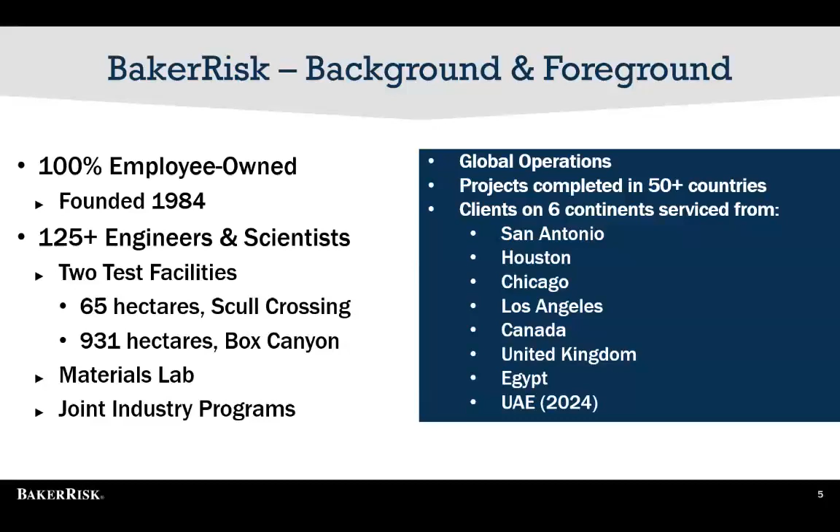Okay, what we do. So we have 7 major areas, service areas, and then we have one wholly owned subsidiary, which is product oriented. The 7 areas that we have for services are process safety, and that's what Rob and James will be speaking about here momentarily. Structural response and blast effects.

Now, those 2 categories are areas in which we gave a week-long course 2 weeks ago in Cairo for the capacity building program Wave 2. We also have another service area known as accident investigations.

That's what we're all about.

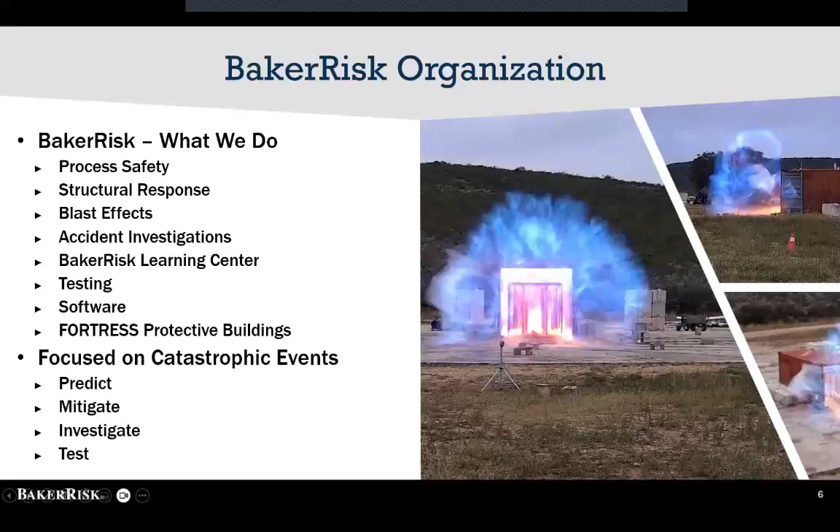One of the key things James will be focusing on is the importance of leadership, senior leadership, in all this. A process safety management program will be destined to fail at some point if there is not strong acceptance and leadership from the top of the organization.

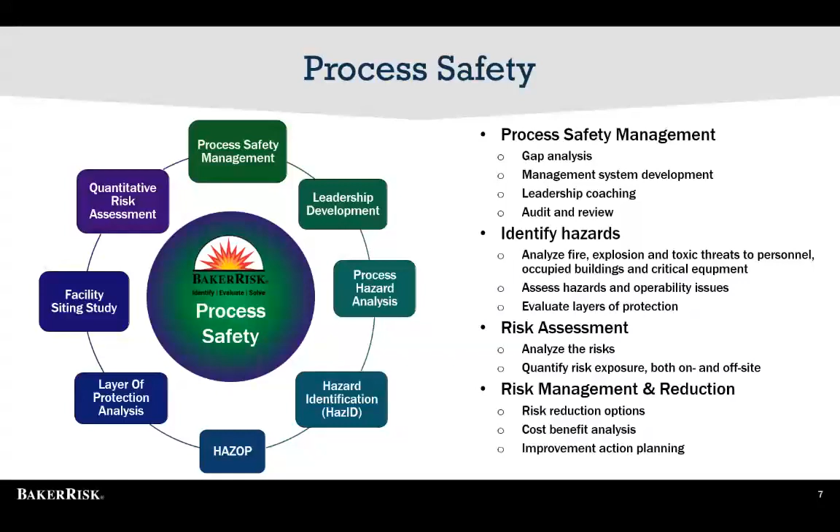Okay, getting back, I mentioned earlier our joint industry program. We have several of those, programs where firms have basically funded research that they want to see, and we have a few different joint industry programs. One is known as the ERC, Explosion Research Cooperative, and a lot of the videos and photos you'll see of testing and explosions were done on their behalf.

Another one we have is for pressure testing, and another one we've been active in for several years now is ammonia and fertilizer, focused on that industry. Those are known as JIPs, Joint Industry Programs. We have global members involved in all of those.

We're also quite active in authoring and contributing to various CCPS guidelines and books. The most recent one is Managing Abnormal Situations. I think we have another pending one coming out shortly - James, do you recall the name? Off Maintenance and reliability - returning equipment to service.

And then certainly validation testing for industry standards, API 752, 753, 756. Those are all in the process of being updated as well, and I'm told will be released imminently. We're very actively involved in API on a variety of committees as well.

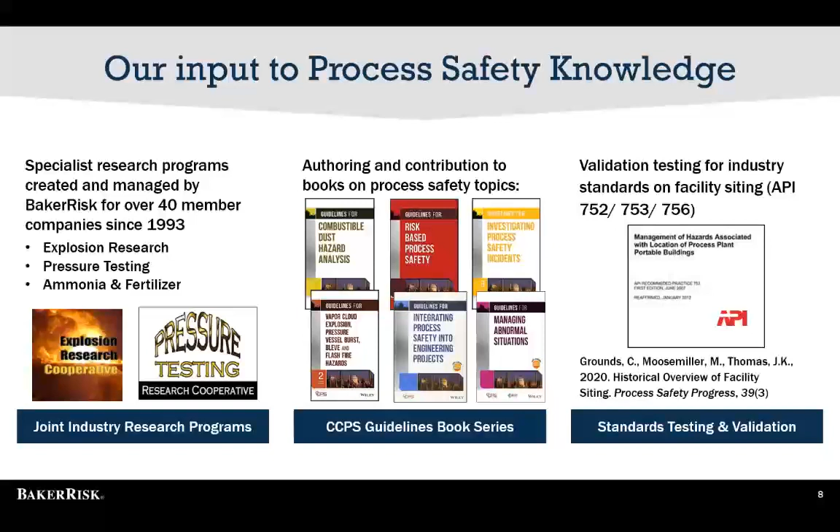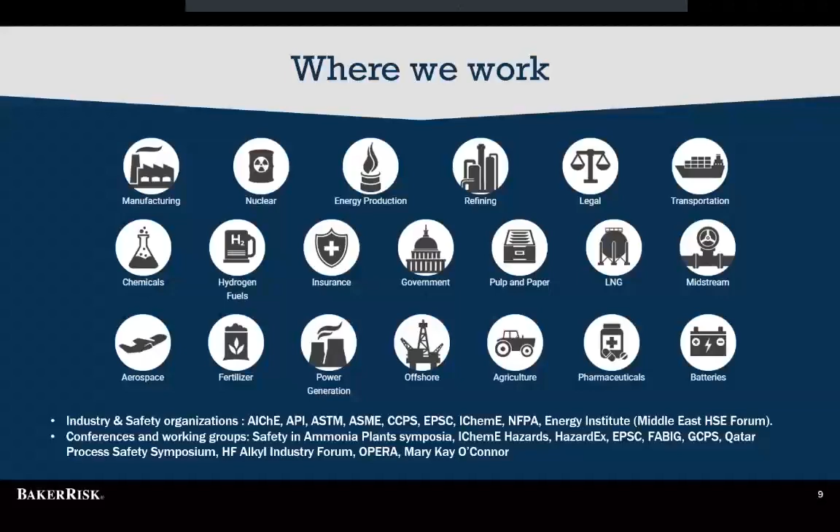Okay, our commitment to the Egyptian PSM program. I want to thank from the ministry, Engineer Ala Hagar and Wessam Sakar and their staff for their cooperation and support over the last year, not only in this webinar, but they've been quite good to work with and very receptive. I give the ministry a lot of credit for what they have set up here.

We have the opportunity to view PSM programs throughout the world from various countries that have set it up. One of the reasons we are so committed to Egypt is that Egypt has done it right - it's probably one of the best I've ever seen globally for a country setting up a new program, and you've done it extremely well, continuing to do it extremely well with all aspects, including your capacity building program. You should all be very proud of being part of the industry in Egypt.

We are certainly very supportive of each of you, and will continue to show our commitment as we have for the last several years.

Our involvement started several years ago with the PSM technical peer review process. I want to thank Amr Hassan, an independent PSM senior consultant. He headed the technical subcommittee, and it was from his involvement that BakerRisk was brought in. Rob McGraw got involved and led a team of 10 or 11 people from BakerRisk doing technical peer reviews over a period of time. That really made us aware of what was going on and kicked it all off.

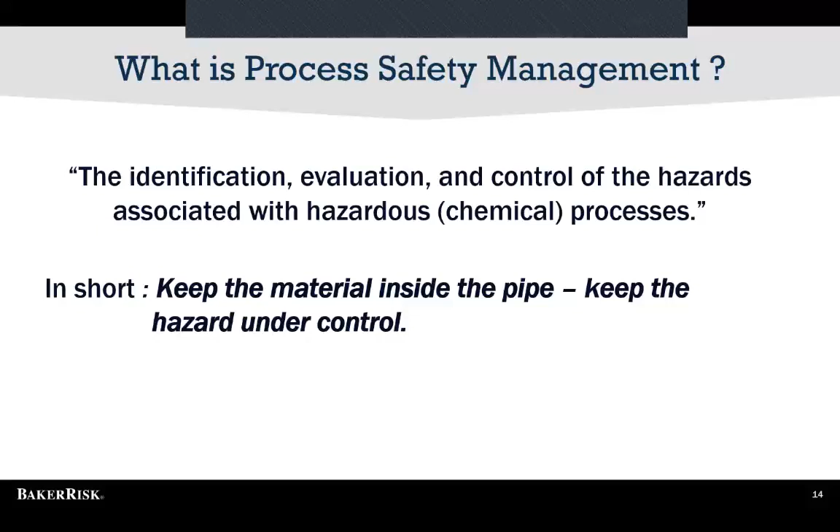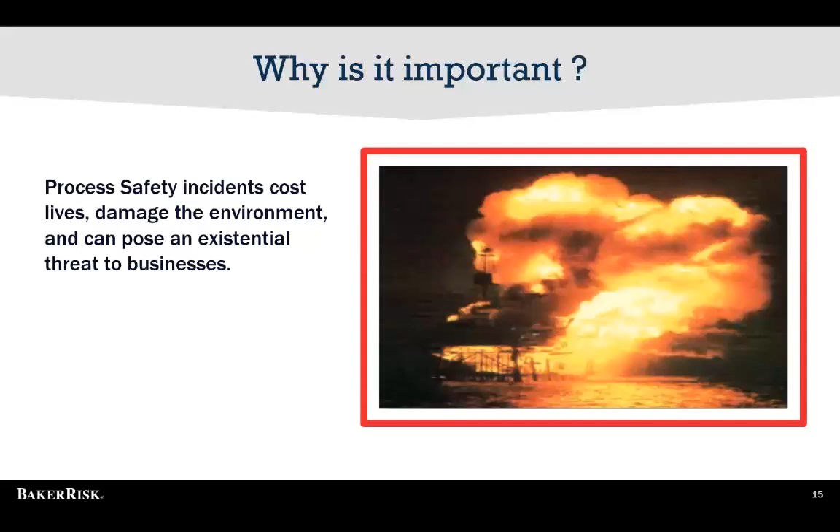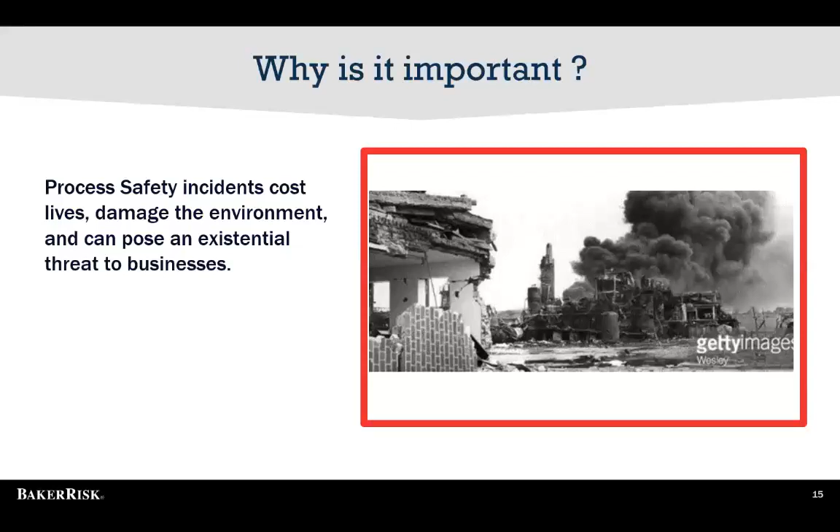The examples shown include many from onshore, upstream, downstream, midstream, chemicals, and other sectors, as well as offshore. Examples go back as far as 1947 to the SS Grandcamp, a ship that exploded containing ammonium nitrate in Texas City, through to the famous Flixborough explosion in the UK in 1974.

That killed 581 people and injured countless thousands of others. There was a cyclohexane explosion that killed 28 people, and was very much a catalyst for the whole process safety development.

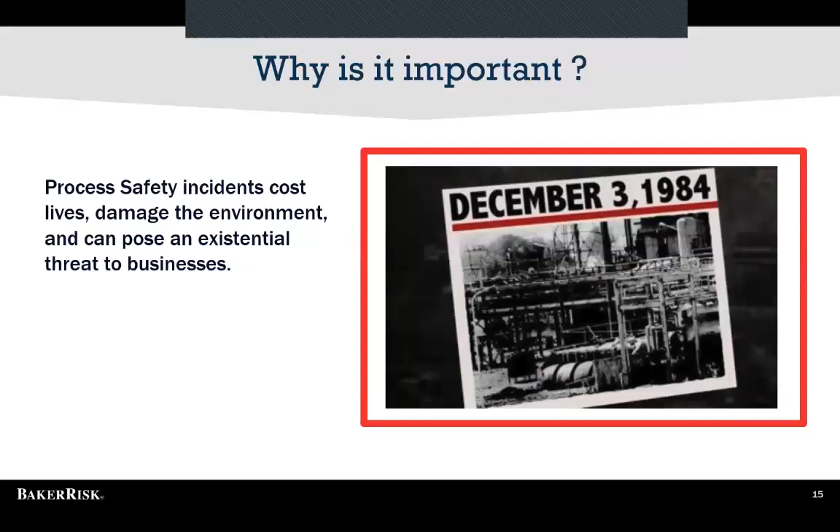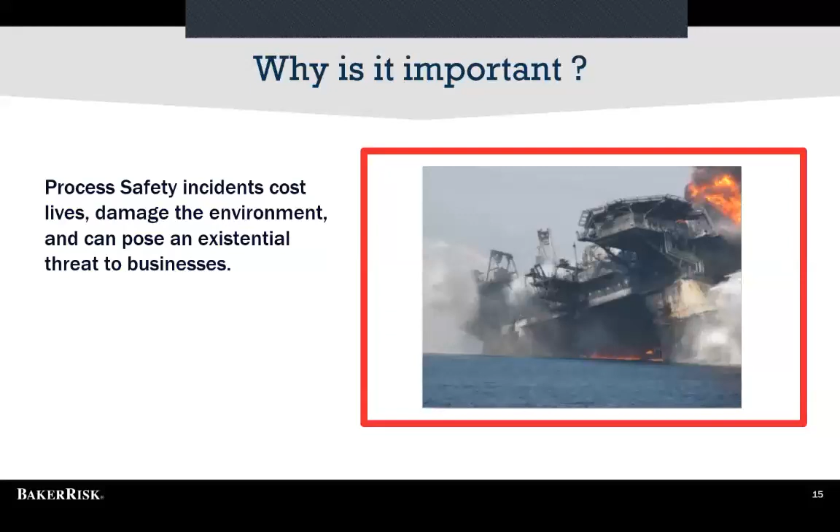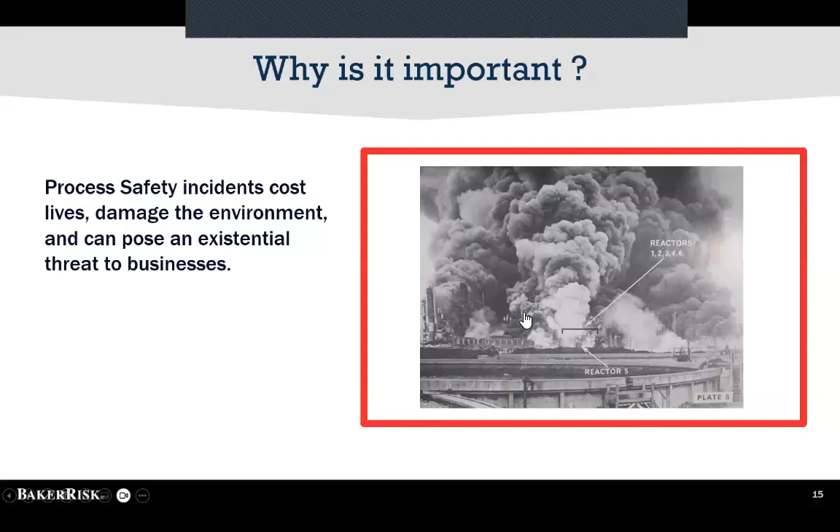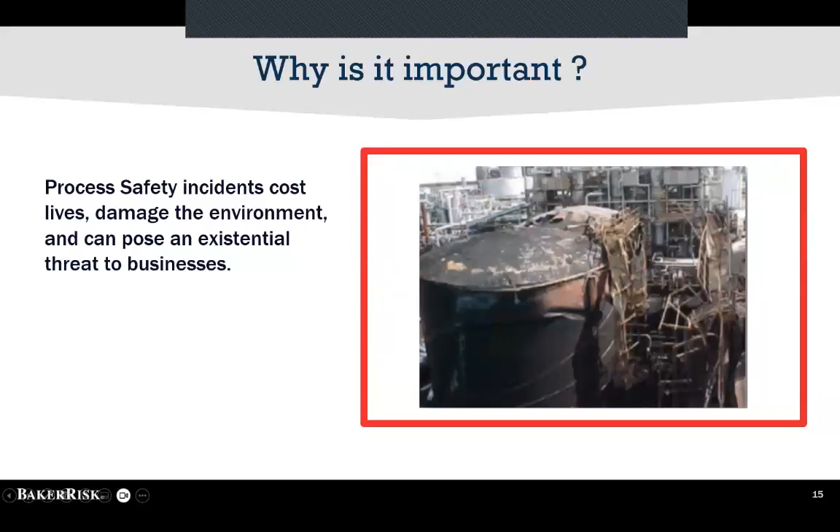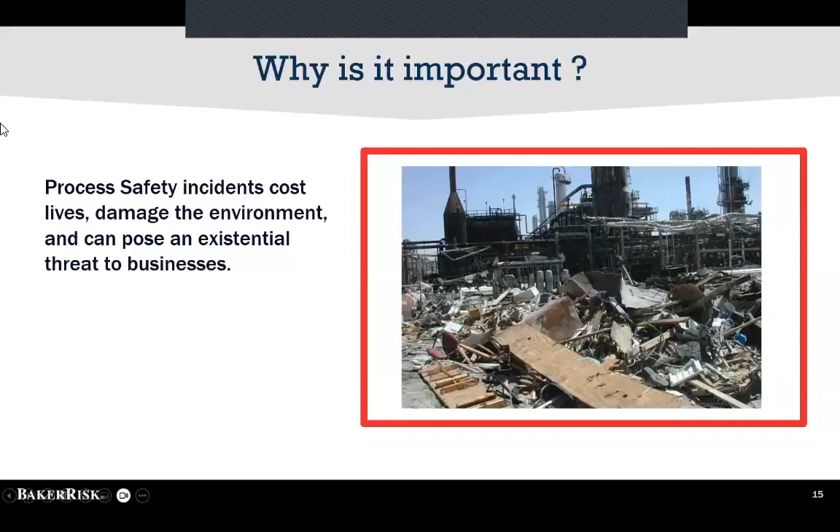Offshore, we've got the Piper Alpha platform - multiple explosions and loss of the platform in the North Sea in 1988 that resulted in 167 deaths and major changes to the regulation and control of offshore development in the North Sea.

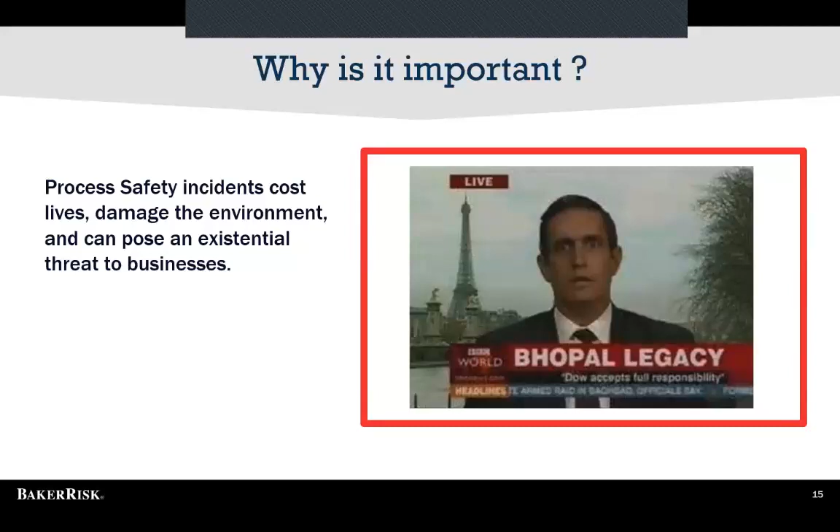More recently, we had the BP Macondo well blowout in the Gulf of Mexico. It killed 11 people and caused massive environmental impact, with ongoing oil spills for several weeks after the initial explosion.

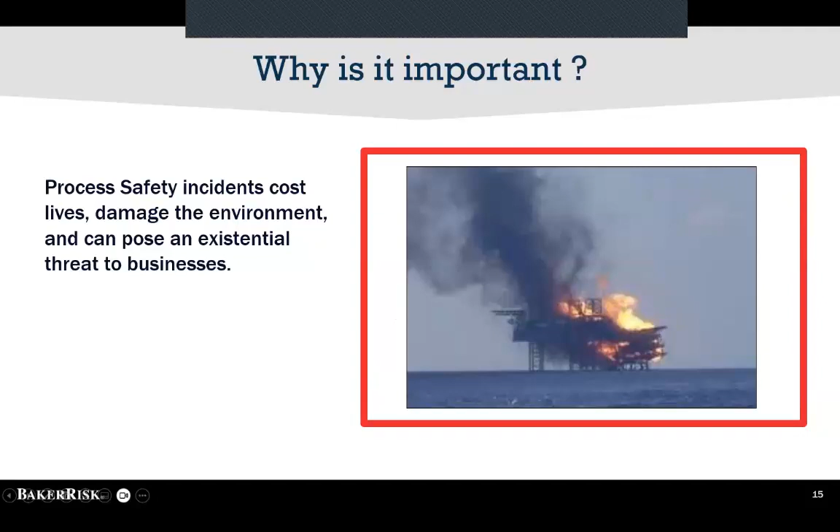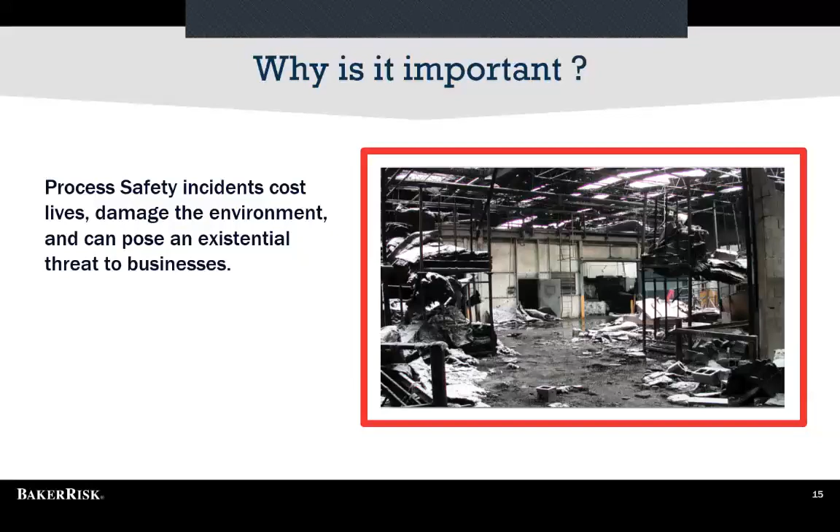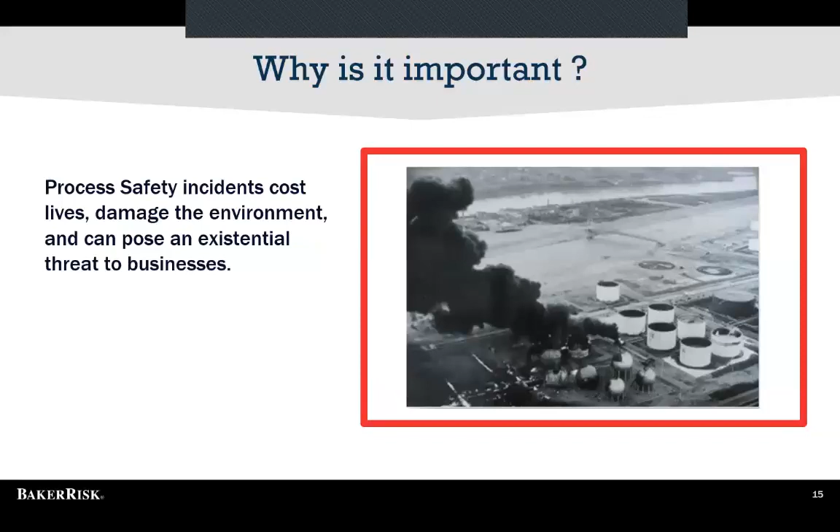Process safety management considers risks in many forms - business risks. We're looking at health and safety, environmental, financial, and non-financial impacts, particularly in this age of instant social media coverage. The impact on a company's reputation if it has an incident can be instant, so the importance of this is increasing.

So what do we need to do? The key to this is understanding what can happen, and therefore what we can do to prevent it happening.

As Wayne mentioned, we have various research and testing capabilities, and we use those to understand the processes taking place, to underpin the tools we use for doing the analysis, and also a bit of reverse engineering from the incidents we investigate to try to confirm potential theories on how an accident occurred.

We can do tests to confirm whether that was a reasonable hypothesis. From that understanding, we get the knowledge that helps us assist our clients, assist you guys, in preventing those incidents from occurring on your site.

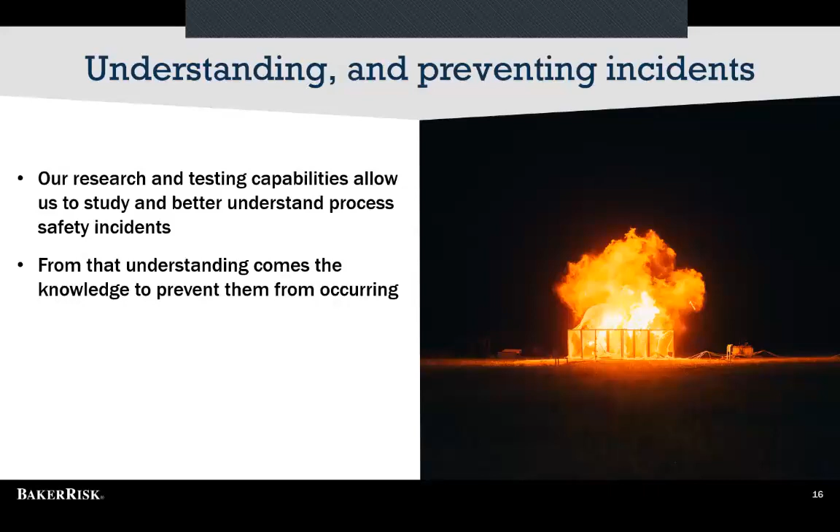This is a view of one of our test facilities, or part of one of our test facilities - this is Box Canyon. In the subsequent slides, I'll go through a series of test videos that show how accidents can develop, from material getting out of the pipe to impacting people, buildings, and other equipment.

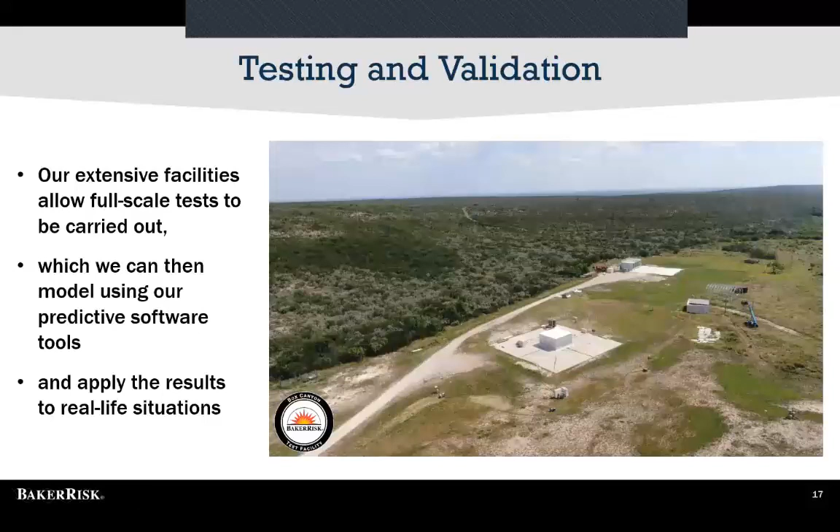So the first thing we said is getting out of the pipe. What does that look like? This.

So this clip isn't very exciting, to be fair. They do get better, but this shows what a release looks like. This is propane being released from an orifice about half an inch or 10mm - a very small hole. The visible amount is just where the water in the air is condensing. The actual cloud itself is significantly bigger than what you're seeing from the vapor.

But bear in mind, this is propane, but equally this could be a toxic material, such as the methyl isocyanate that was released in the Bhopal incident. So again, you can see how this disperses from a small hole. This hole is very similar to many instrument or sample connections that might be on your main process pipework, that sort of small bore connection, and you could get this release into your operating areas, affecting personnel there.

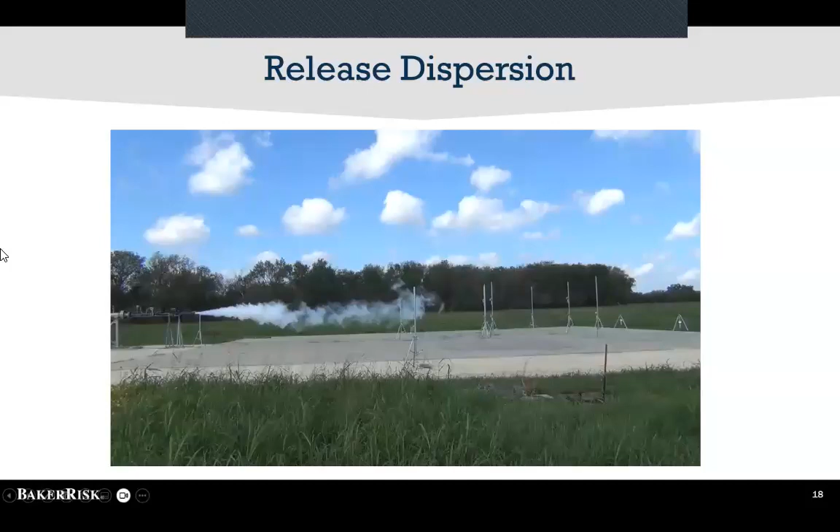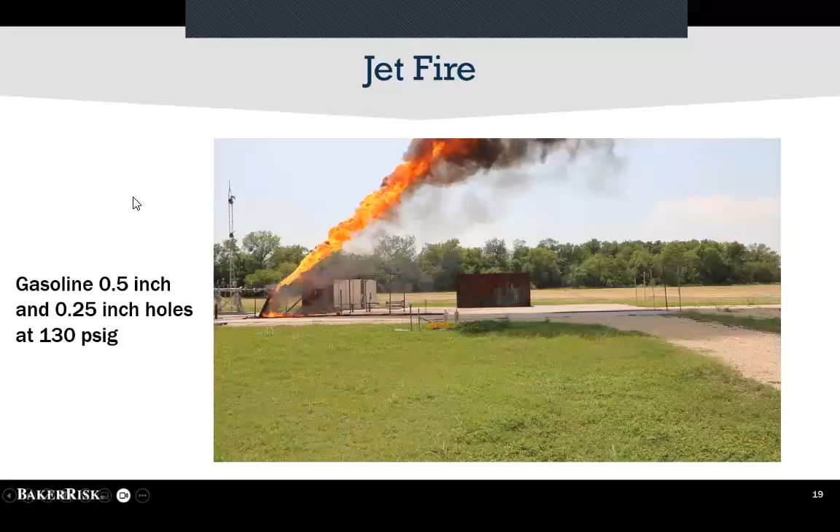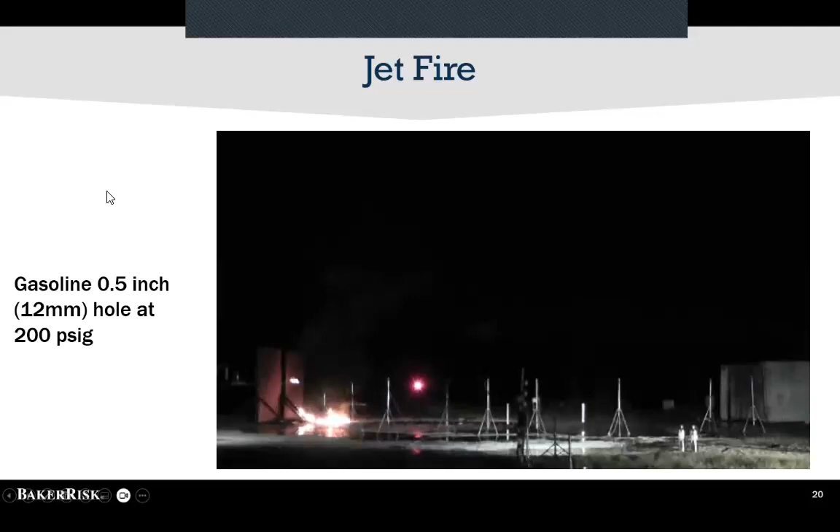Okay, so if we have a release, what can subsequently happen? This shows what can happen if you get a flammable release and it gets ignited. Again, we're talking a very small hole, half inch to 12 millimeters, and this particular example is gasoline. So that shows what happens if you get a release and it ignites fairly instantaneously. Another test at night shows it a bit clearer, and you can see that instant impact across several tens of meters.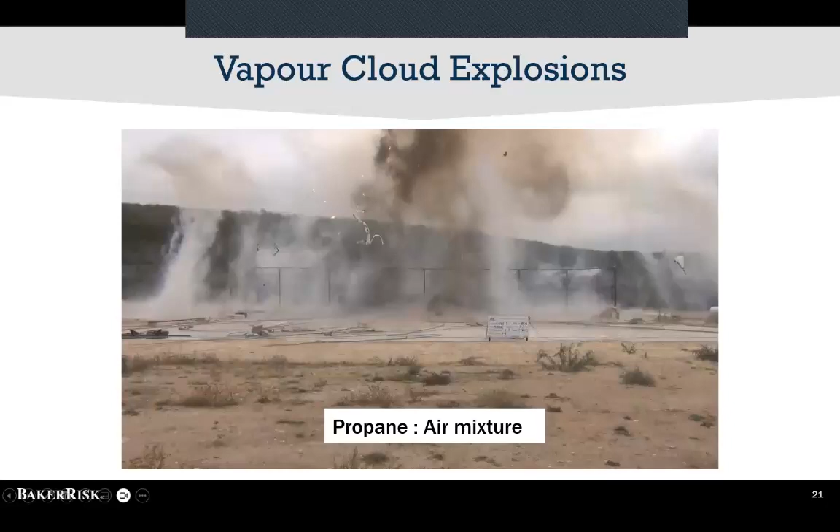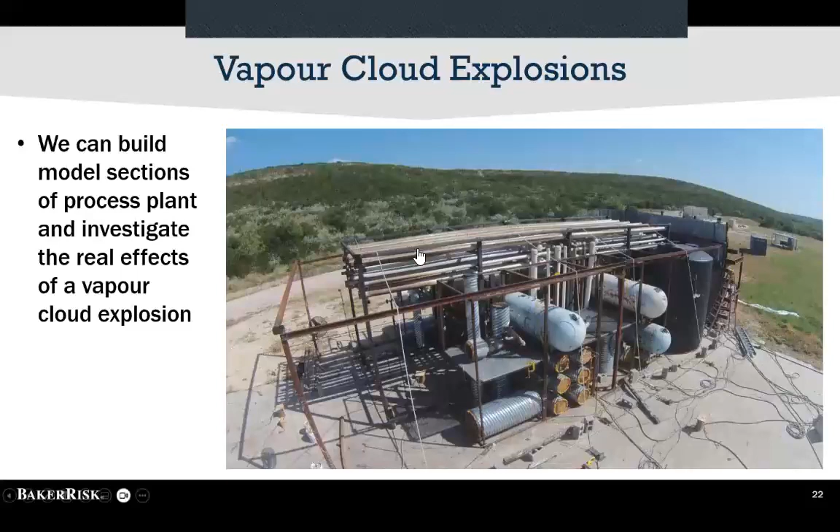So as I said, we use various piping and other equipment to simulate congestion, but we also validate against real equipment. This was a mock-up of a plant unit where we wanted to validate our control tests against some real equipment that was very kindly donated by one of our clients for us to destroy. This shows how we get the same impacts from our control testing with real equipment, and it allows us to validate the testing that we do.

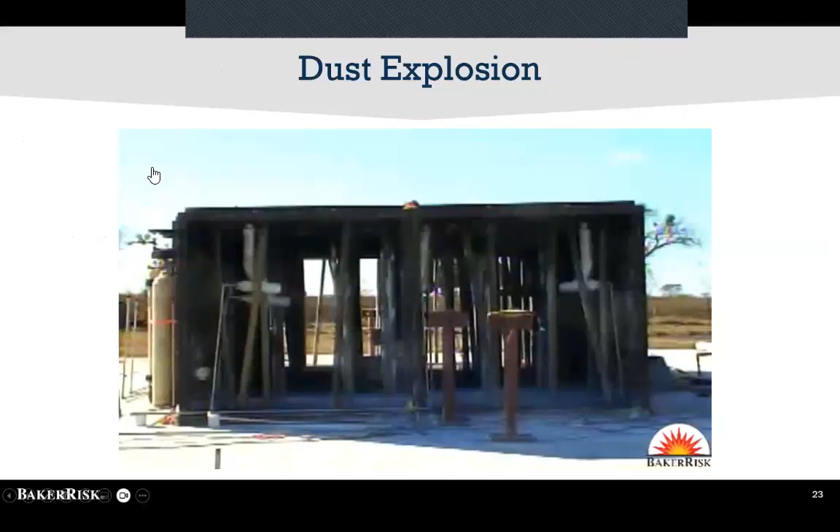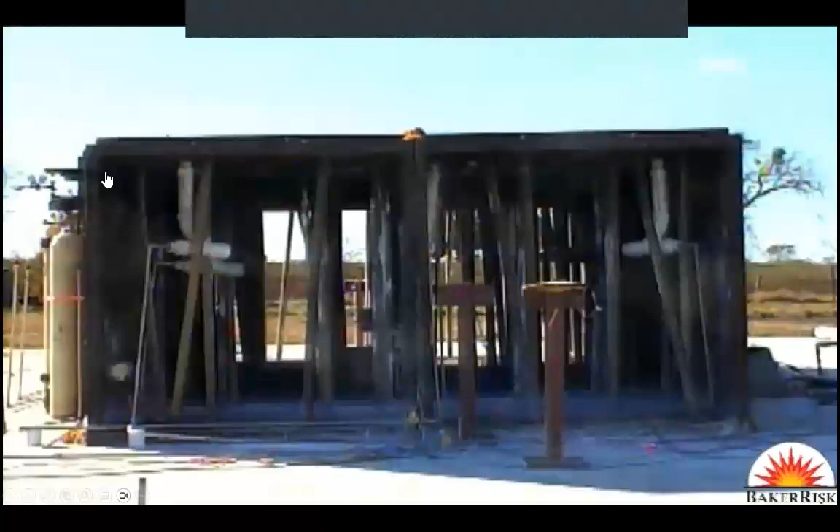Flammable gases and toxic gases are not the only things you may have to worry about. Dust explosions are another potential hazard for many operations. This particular test shows a release of polyethylene dust, and you can see the quite violent explosion that results from what many would think was a fairly innocent release of dust.

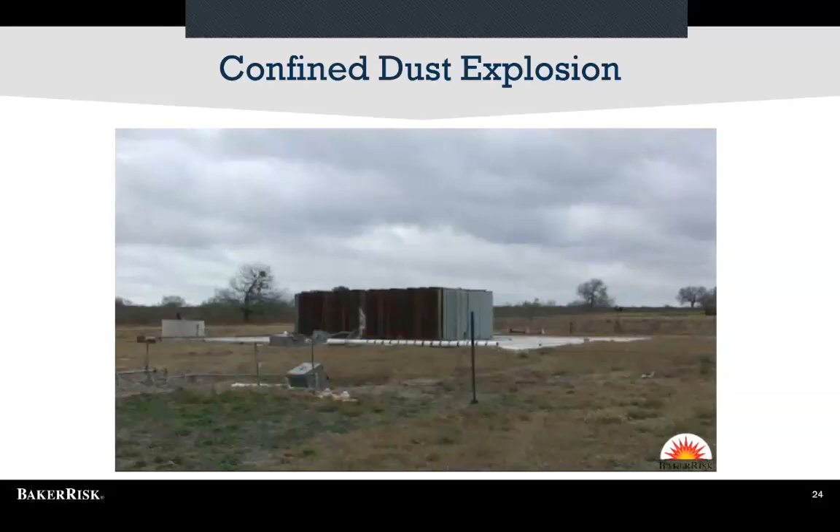Again, I mentioned the impact of confinement on explosions - the same is true for dust explosions as it is for vapor cloud explosions. This test rig has been boxed in - it's a solid rig with panels added on each end, and again a dust explosion is generated inside. You can see how that causes an explosion inside and blows the panels off the end again, simulating what would happen in a real condition with a building of similar design.

So we've looked at these various hazards. There are additional things such as pool fires, where we've done testing, BLEVEs - again another quite violent explosion mechanism - and runaway chemical reactions, all potential hazards that you may need to deal with.

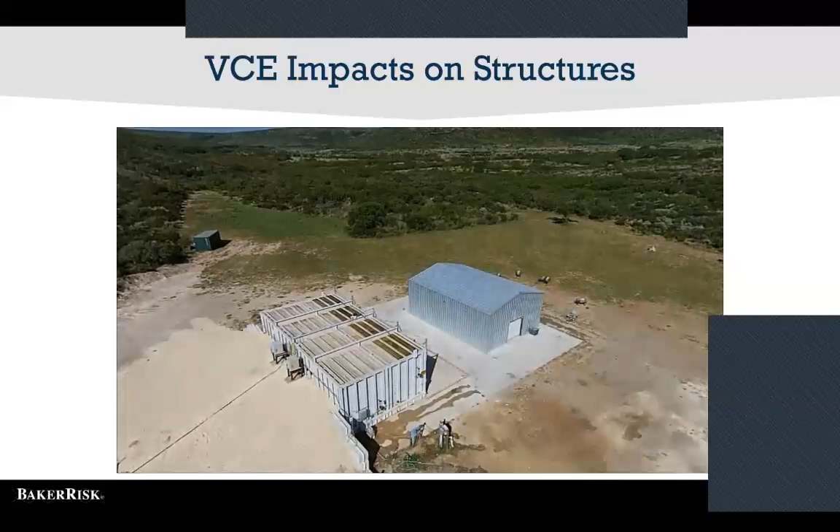So you can see here, although the frame hasn't really moved and the building hasn't collapsed, there's significant damage to the cladding, and the debris flying within that building would pose a significant threat to any building occupants.

So looking at a similar test, this is a similar test again on a blast resistant module. Let's just run the video and then I'll talk you through it.

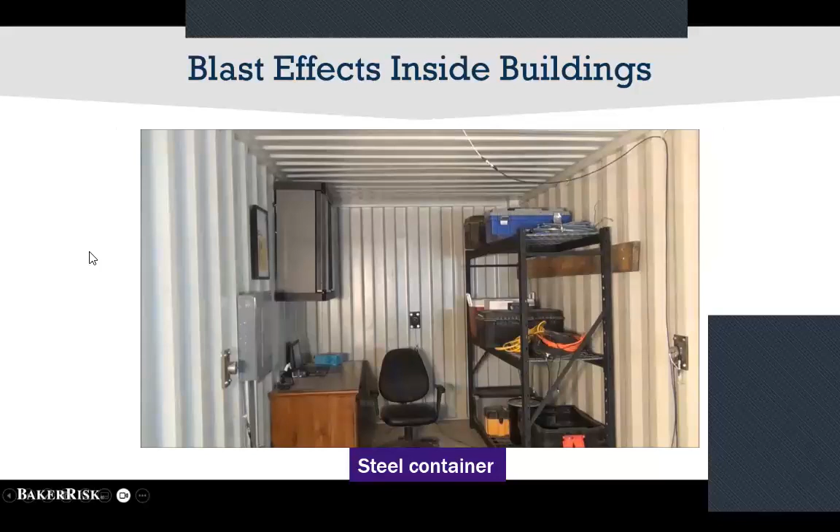So again, this shows the impact inside the building, and although there's some distortion to the actual container itself, it's pretty minimal. But you can see the impact of the fixtures and fittings flying around, and obviously anyone who happened to be sitting at that desk is going to be having a fairly bad day.

So we've identified what can go wrong, what can be the potential impact, and then, well, okay, so what can we do about that to help reduce risk and improve the situation? This is just one example.

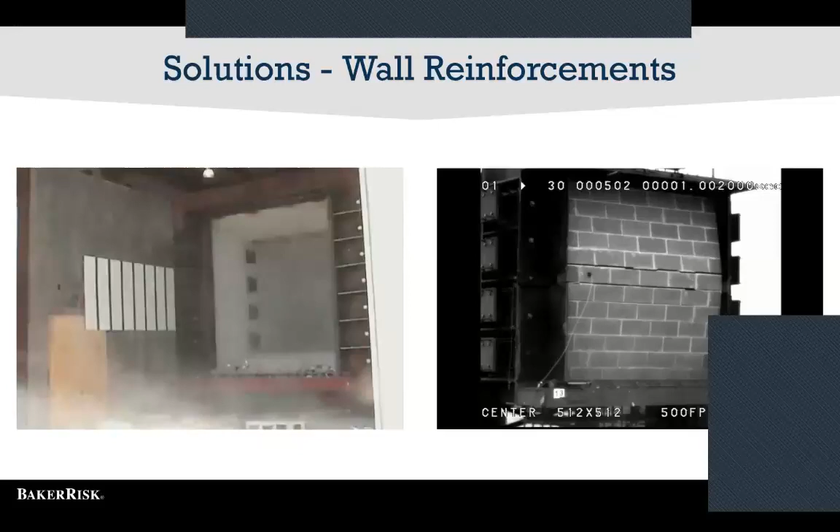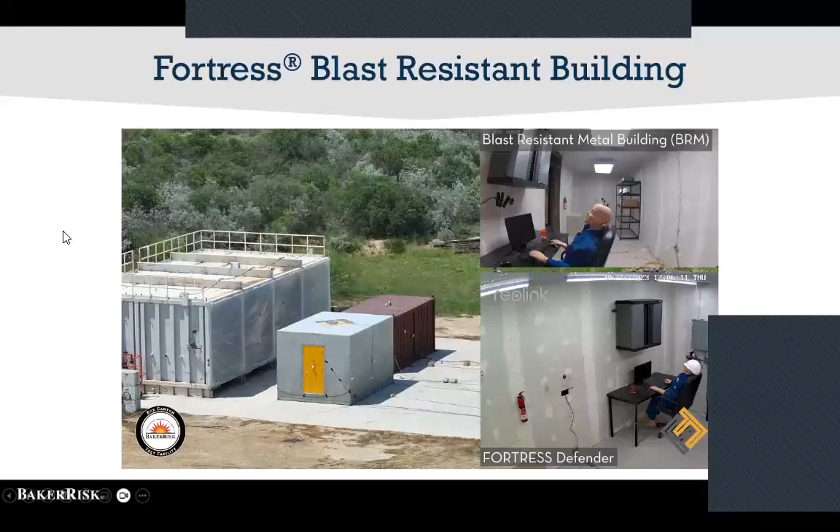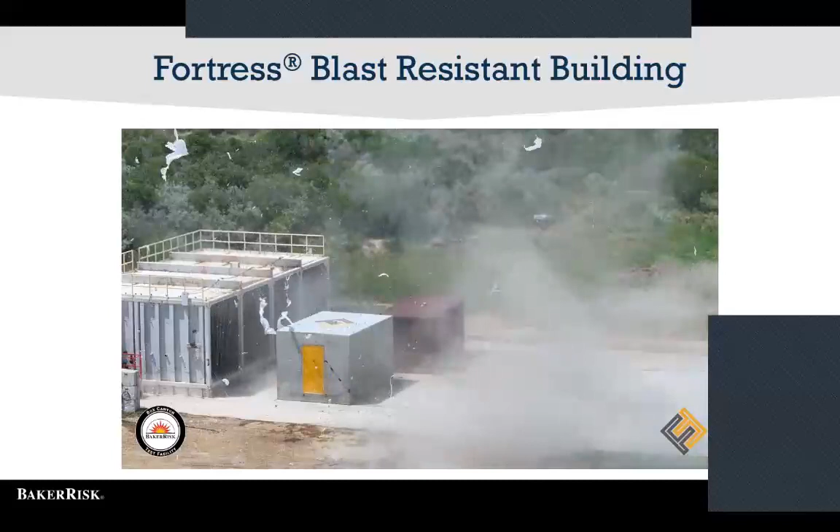And we'll show some internal views as well. I'll just run this video. So instantly you can see how the blast resistant module is pushed back, whereas the inertia of the concrete one held it in place. And then the internal view.

So again, the inertia of the concrete building avoids that violent movement that we can see in the internal of the steel building, where the occupant is likely to be damaged by the movement of the building or the dislocation of the fixtures and fittings, whereas the guy safely tucked away in the fortress building hasn't even spilt his juice.

So you can see that that's an example of a solution to an issue. And again, you could then put that building in a position where perhaps you couldn't put other buildings and still control your risks adequately. Okay, with that, I'll hand over to James, who's now going to talk us through some of the challenges of implementing a PSM program.

Okay James, thank you. Brilliant, thanks Rob. And thanks for that background, which reminds us all of the hazards that we face with our plants. And really, to move this forwards, the standards, the Egyptian PSM standards, as Wayne mentioned, are an absolutely exemplary example of the best practices gathered from around the world. A real achievement putting those together. Now we have the challenge to actually implement them. How do we climb that mountain? And that's what I'd like to talk about now.

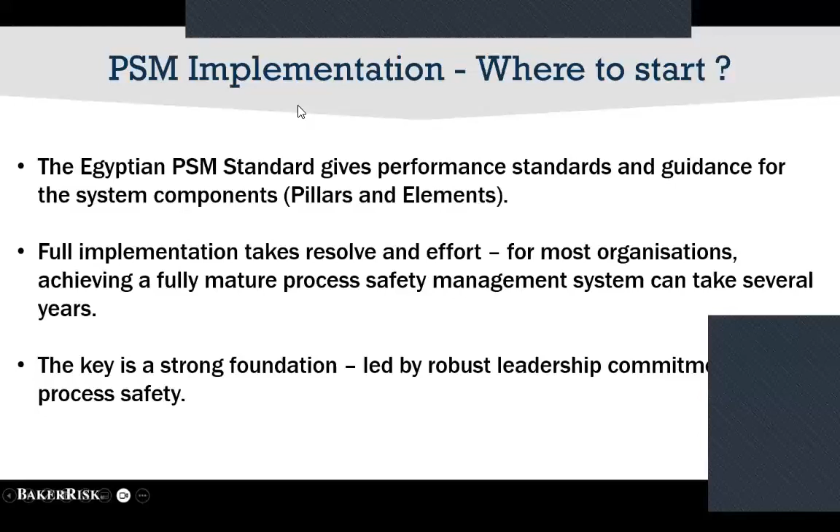That, if it's going to succeed, has to be led by a strong leadership commitment. It's a big task, but I think it's important to remember the saying, whatever the mind of man can conceive and believe, it can achieve. It takes time, it takes effort, it takes focus. But as Rob demonstrated, the benefits to safety, to the environment, and to our business are very considerable.

So really just to focus on that for a minute, the role of leadership is to lay the foundations. If we build a house upon the rock, it will stand strong. And that's the important thing at the beginning of this process. A deep, strong commitment from the top of the organization, from the leaders, will propagate down, will influence the people through the management, the supervision, the operators, to take this seriously, to give it the consideration it needs. And I think it's important to remember there are three questions we should all ask ourselves.

We know we have hazardous chemicals. We know we have hazardous processes. We should always know what is there that can cause us harm.

The next point, going back to Rob's process safety cycle, is in which case, what is going to protect us from that harm? A lion in a cage is still a lion. But if we put the lion in the cage, we are managing that hazard. So we have to understand what are the barriers, what are the safeguards that keep us safe, that keep our business safe, that keep our people safe.

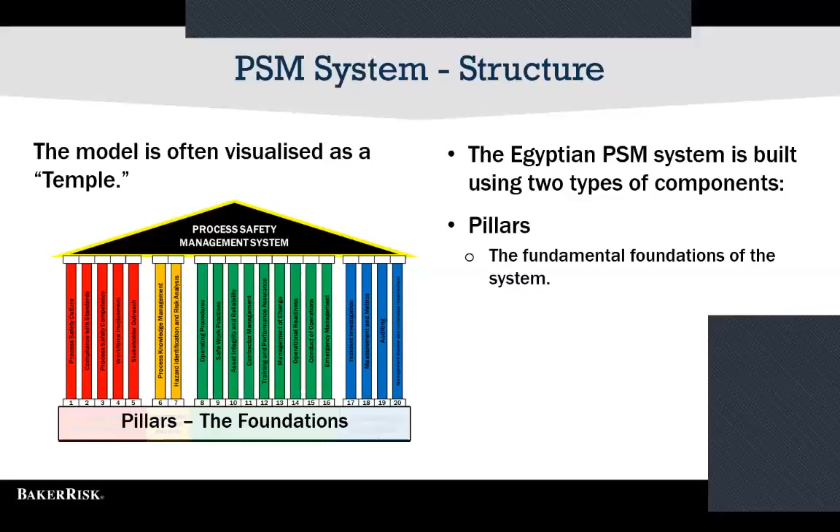It has vertical elements that hold up the roof, and the roof is in fact the system, the business that we support. The Egyptian PSM model describes these as two types of components. At the bottom, we have the pillars, the foundations, the fundamentals if the system is going to survive and grow. And above them, we have the elements - the individual standards which are so well set out with the Egyptian PSM system that hold up the roof, that hold up the building.

Has that dealt with our problem, Joanna? Have we still got the issue? We still have it. Okay. Is it worth me dropping screen sharing? I'm just nervous about doing that midstream.

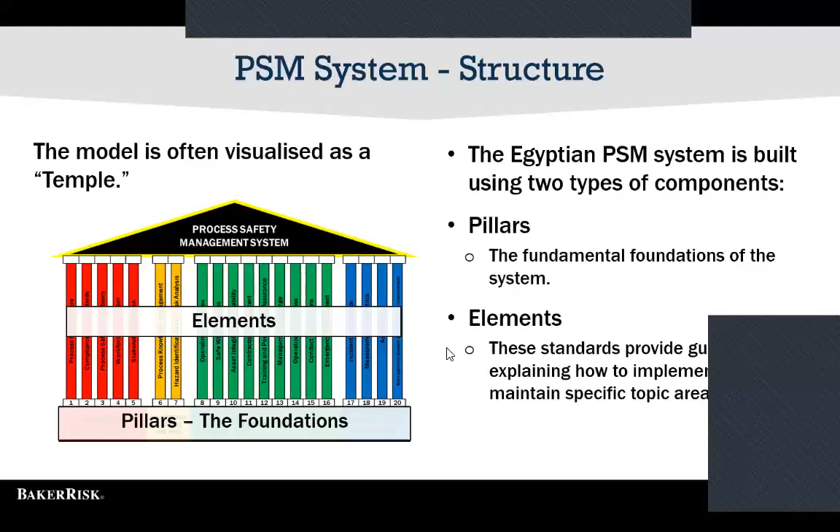I suggest we just continue, James. Thank you. Okay, so let's just look at this now in terms of how do we implement this? We have a model, we have a great deal of detail, but how do we actually deal with the main problem that we face, which is how to implement this?

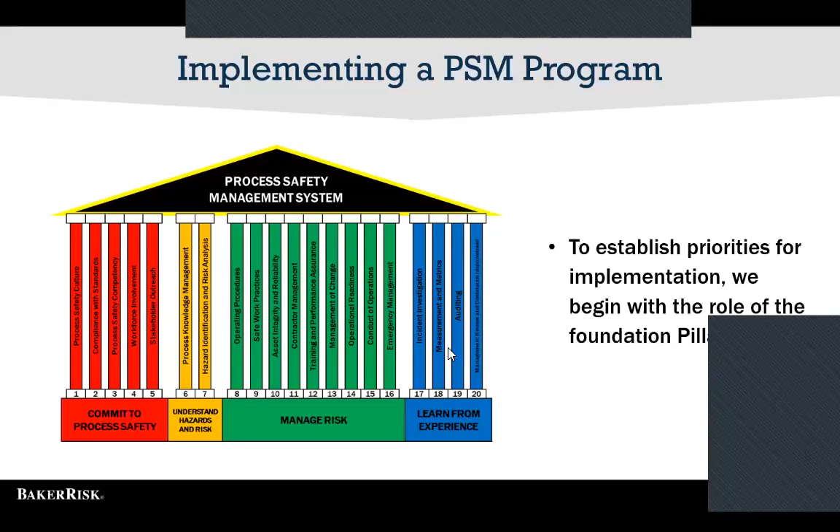So first, let's look at the structure we have. If we take away the detail, we're left with the foundation pillars: the commitment, the understanding of hazards and risk, the management of risk, and learning from experience. And these are so critical because they actually form the improvement cycle that we need in any management system.

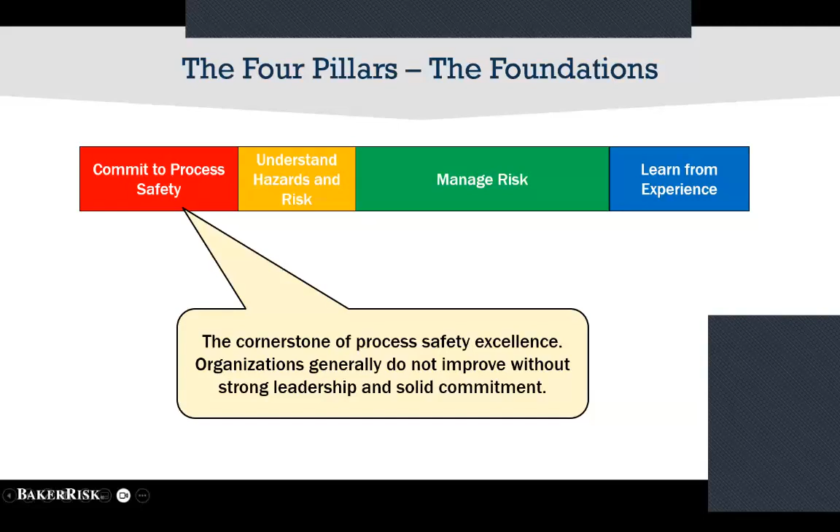So the first one, the commitment, we've spoken about. This is the cornerstone. Vitally important for any system to have leadership and commitment. If we have that, we can provide the resource, we can provide the focus to understand the hazards that we have, to understand the risks that they bring to our business. Because if we don't know about a hazard, if we don't identify that hazard, we cannot manage it.

We look back in history in the case of the Titanic, the ship that sank in the North Atlantic with huge loss of life. They didn't see the iceberg as a hazard, and yet the iceberg destroyed the ship and caused huge loss of life. We have to know about the hazards if we're going to manage them.

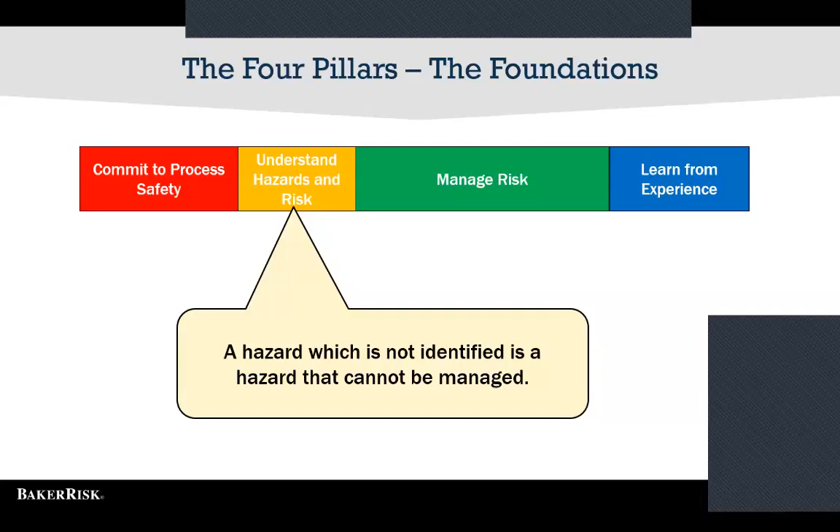Once we know about a hazard, then, as Rob demonstrated in the process safety cycle, we can focus on managing them. How do we bring those risks down to a safe level for our business, for our people?

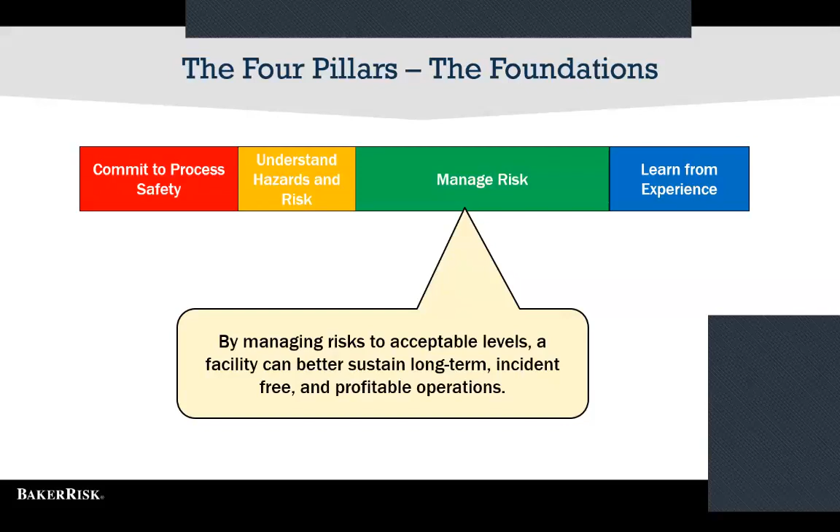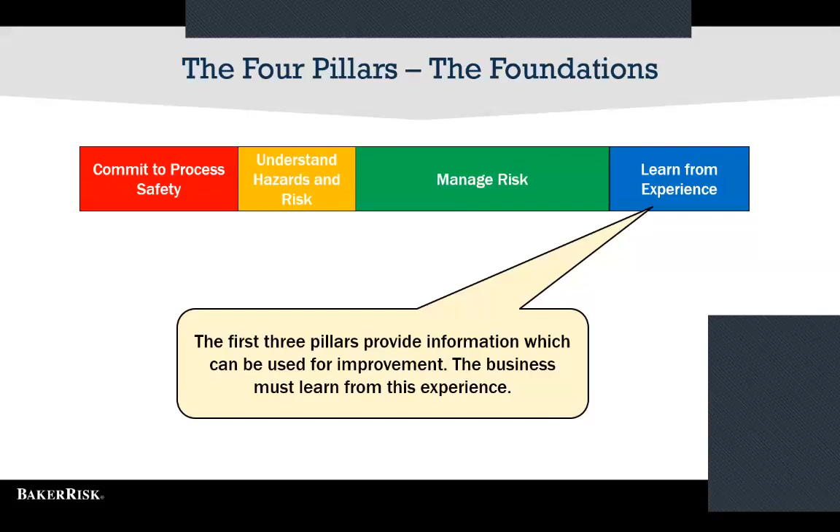And finally, we have learned during that process. We have discovered, we have assessed, we have analyzed. To improve, we must learn. And that is what the first three pillars give us, is that information to learn from. Any business which is going to thrive has to learn. So if we put these four pillars together, they provide a very, very powerful improvement cycle.

We begin with commitment. We understand the hazards and risk. From that, we know how to manage it, to keep our business safe. And as things happen, things will go wrong. But the important point is that we learn from them. We learn far more from mistakes than ever we do from doing things right, even if it's a painful process.

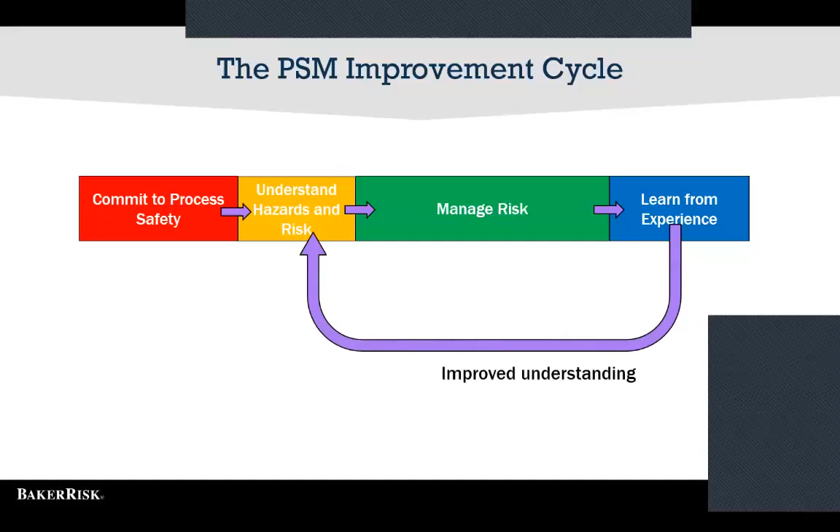But that learning means we can go back and improve our understanding of the hazards and the risks that we face. And as we do that, it allows us to strengthen our commitment. We see that we're making our business safer, making our business better, and it allows us to strengthen that commitment. So that is the key cycle. And that is really what we want to talk about today, is starting this process. It takes time, it takes experience, it takes judgment. But this is the key to making any business stronger and safer.

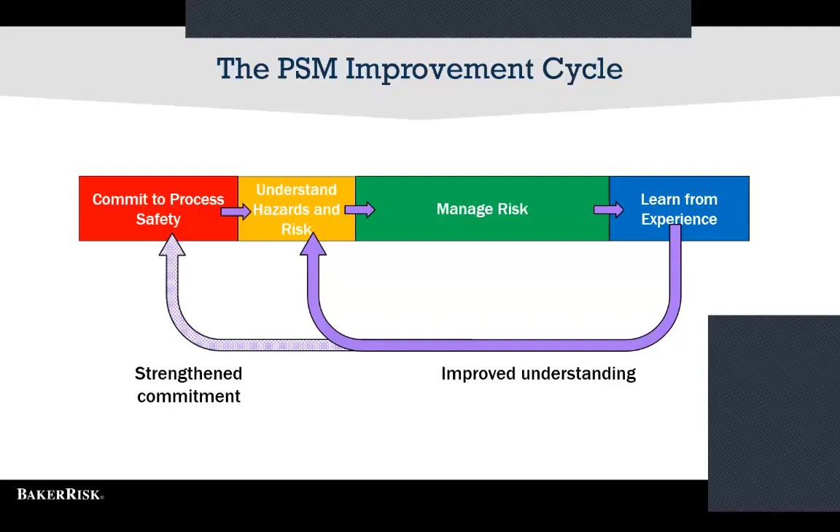So how do we put this into play? All our organizations are different. As individuals, we are all different. So we have to consider that in how we make our plans, how we set our priorities.

So we need to ask some questions. What is our safety culture now? Is process safety management a new thing to us? Is it something that we already have experience of, that we're learning? And what is the shape of our organization? Do we just have one site making one product where everything is hopefully under control? Or do we have many different sites, and do they make many different products?

Some may be more hazardous than others, so we will have to accommodate that in our system. And a very important question is, how old are our installations? In my operating experience, I had very few opportunities to build a brand new plant. I had plants that were built 10, 20, 30, 40 years ago, and I had to manage them safely. I couldn't just demolish them and start again. So we have to think about those questions to set what we call the context for the organization - what is going to be right for your organization before we begin to build the detail.

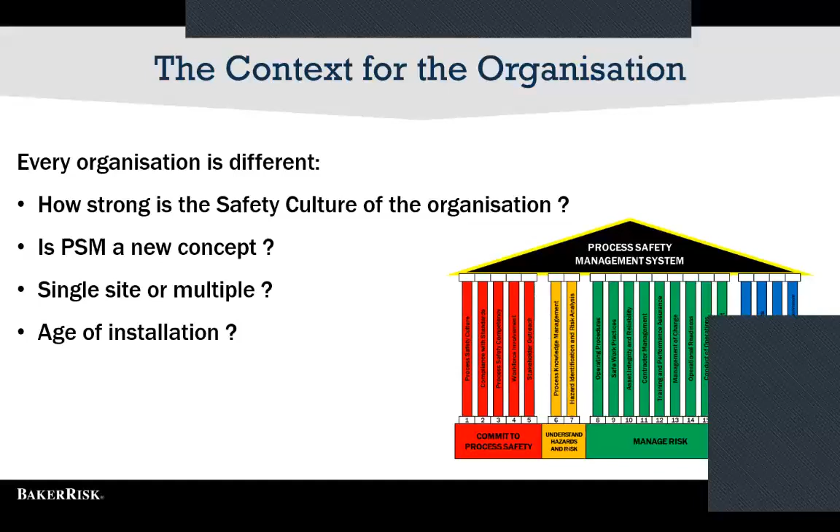An important point is, what is the culture? What are our beliefs? What are our approaches to process safety? This is talked about a lot, and there are definitions from CCPS. The one I always refer to came from the Energy Institute's Hearts and Minds program, developed after the Piper Alpha offshore disaster in the North Sea, UK. It says you really understand the safety culture of an organization when you see what happens at 4 o'clock in the morning when no one is watching. What are the true beliefs of the organization?

It's important to remember that those beliefs are always set by its leaders. So developing this, and as Rob mentioned, coaching this, explaining how to make the right decisions at the right time, is so key on this journey. This is how we set up what we're taking, how we're traveling, and what really matters to us.

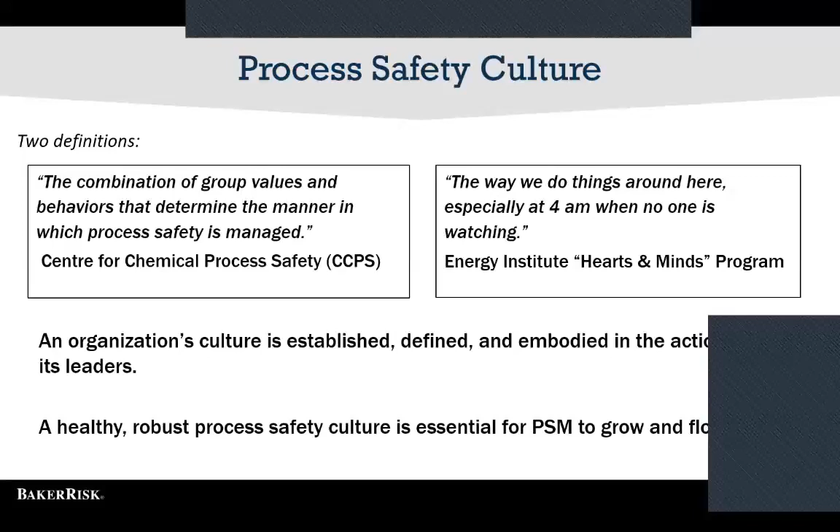An organization that learns will adapt, it will grow, it will thrive. And we come back to this question of chronic unease. If we're always checking, if we're always just a little bit worried, we will make sure everything is working correctly. That saying, if you're not worried about something, you're probably missing something, is probably the key learning point here.

We base our decisions on information, on data, on expertise, and this is an area where we're always happy to help. Many of our specialists have had many years in industry operating hazardous processes, seeing what has happened when incidents, when things have gone wrong. So understanding the culture of the organization is so important in shaping how we implement process safety.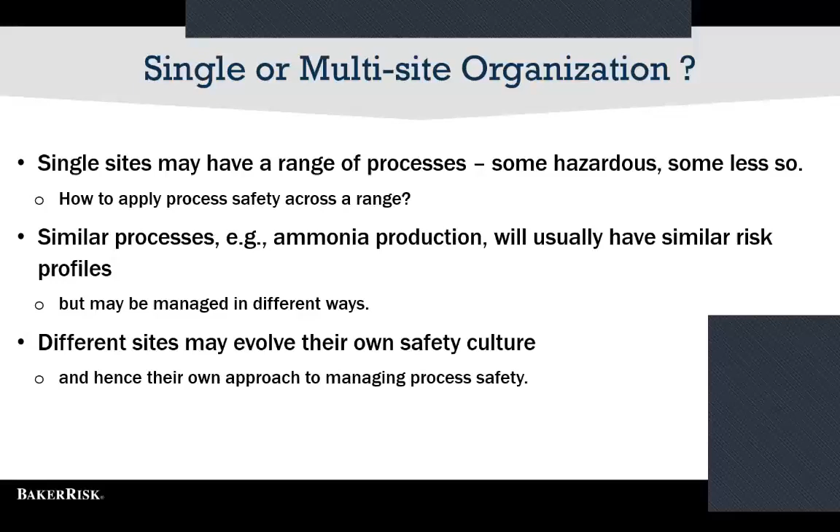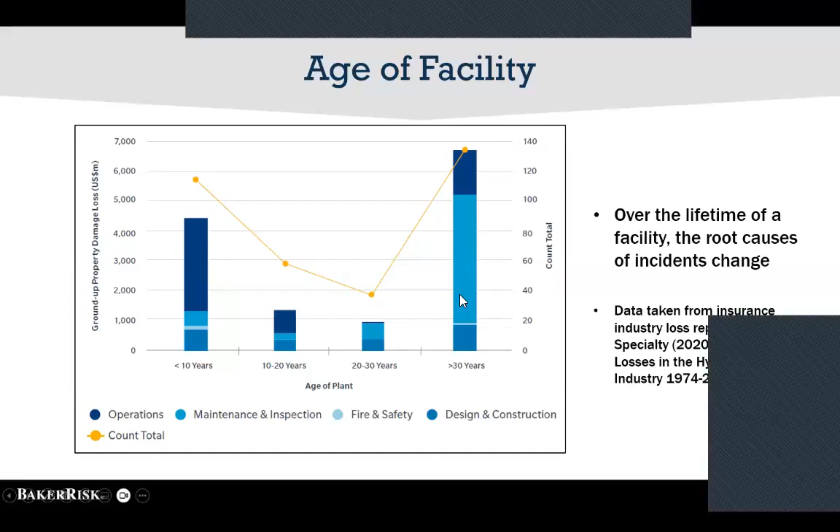As we move through, to my question earlier, I only ever had one new plant in my 35 years in industry. That was much easier; the old plants were far harder to deal with. This is data from the insurance industry, looking at where financial losses occurred, and they occur most at the beginning and at the end. That's what we often describe as this curve, a failure curve. In some ways, it reflects human life.

In the beginning, a small baby has many risks, and then hopefully we grow into a strong person. Our life is productive, but at the end, we become old, we become frail. We have to be aware of these three stages, and they apply to a chemical plant.

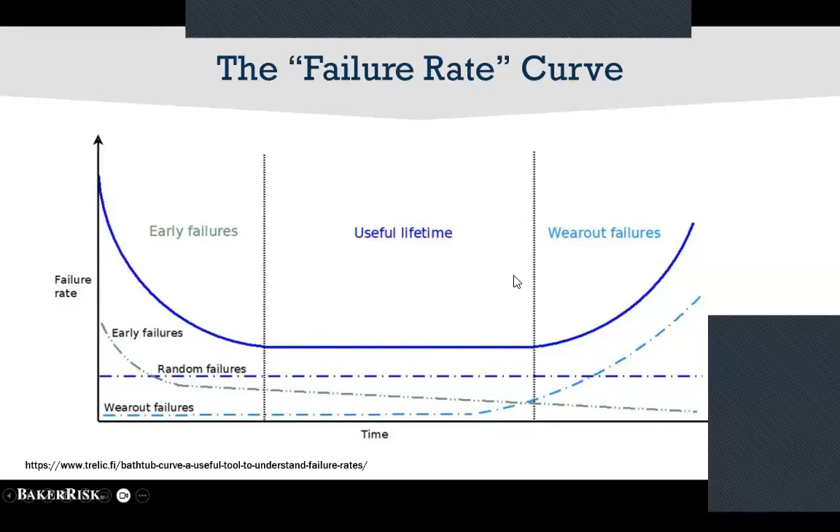In the beginning, we are learning how to operate the process. Our operating teams are learning how to write safe permits, how to follow procedures, how to make sure the workforce are involved and understand what we have to do to stay safe. And over time, we learn—that very important point about the organization learning.

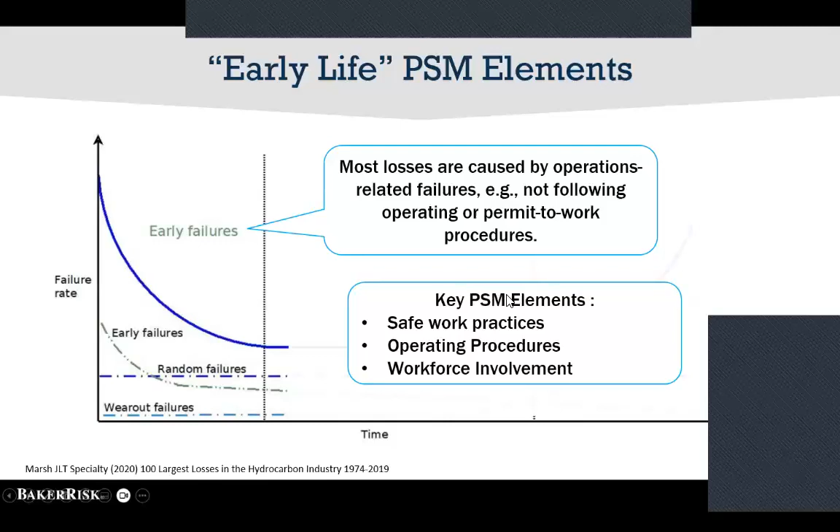And we move into the mature phase. Here we have to focus on remembering what we have learned, not becoming complacent. Just because everything is okay doesn't mean it will stay that way.

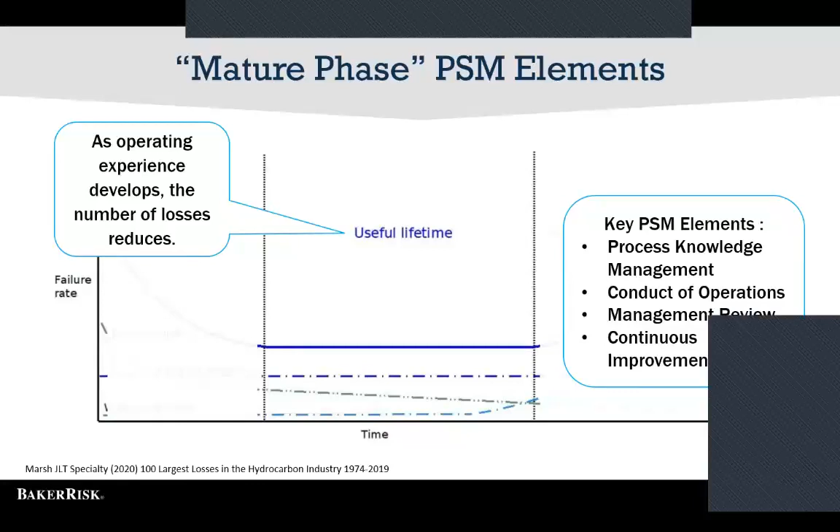Then finally, and this is the battle that many of us face, our plants become old. We try to extend their life. Very often, mechanical integrity becomes so critical here—there can be a significant amount of the failure cause. Management of change, where we make changes to keep our plant running without perhaps considering some of the consequences. So we have to consider the age, the processes we run, and our business requirements if we're really going to implement process safety in a way that will work for us.

So I hope that gives you a few things to start thinking about for your journey with process safety.

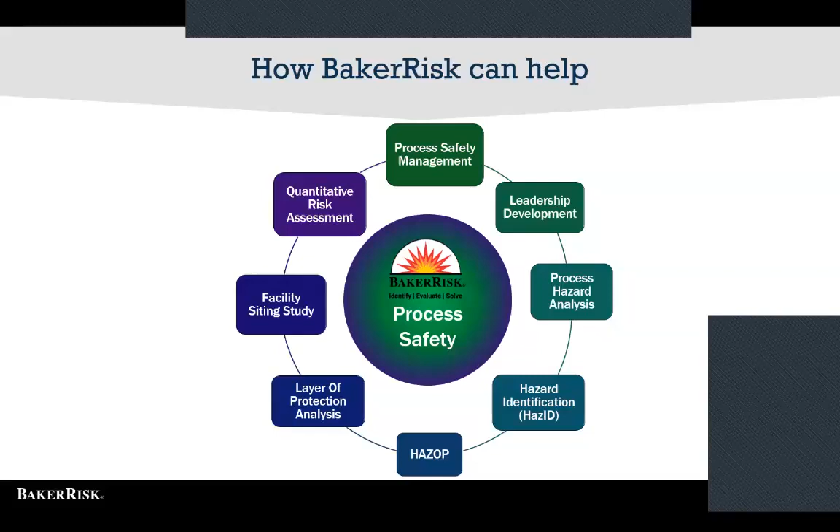All these other aspects are various studies that are done, but you have to do it in an informed way. Everything that we do informs everything else that we do. So all the problems that we encounter when we're on a site go back to our providing solutions, and it just continually informs us. We're very big on feedback loops, and I think you'll start to see that on a regular basis if you're working with us.

James, do you know which way we have to go here? Sorry, Wayne. Yes. Let me just take you back one slide for a second.